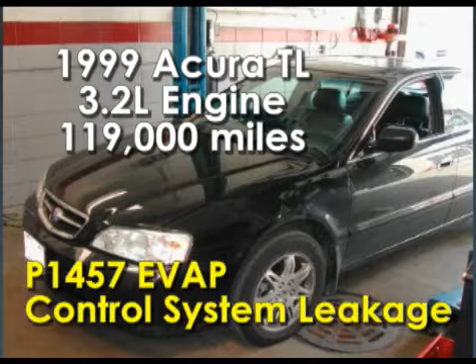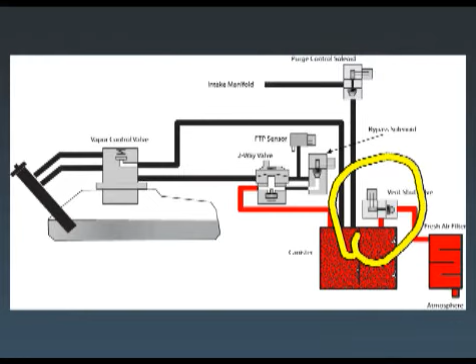So it's a '99 Acura TL. We have a 3.2-liter VTEC engine, and we have a P1457 evap control system leakage. So what should be tested? Circle the two-way valve, the bypass solenoid, circle the purge, and the canister vent shut valve. Any of these things could cause a 1457, along with a leaking hose.

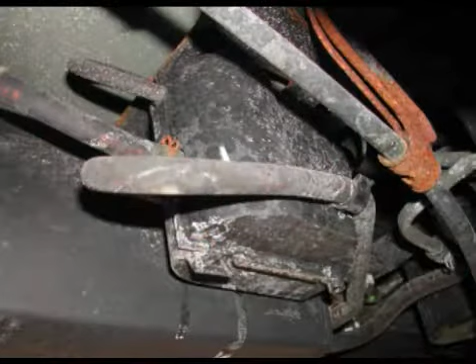There's the purge solenoid, so this is one of the players. Then we have the vent shut valve solenoid, and here we have the two-way valve that's got a cover over it. And we remove the cover, and there's the two-way valve and the bypass solenoid.

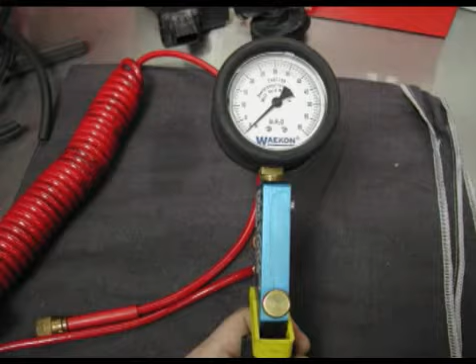Now, the way this technician is going to check this system is he's going to apply pressure to this vehicle from the cap. And he's going to connect a manometer to the front service port. And he's going to check for flow through the system.

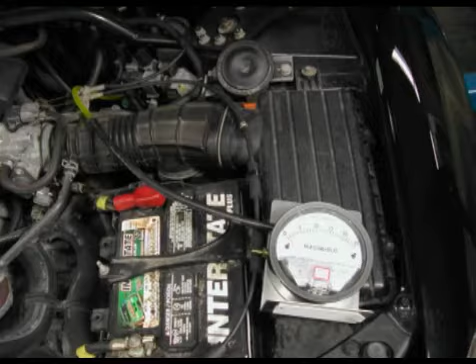Now keep in mind that this device that he's using here, if he has an evap leak test device of some other type and a cap adapter, he should be able to perform this test, especially if his evap leak tester has a pressure gauge. So this tool isn't necessarily needed to perform this test.

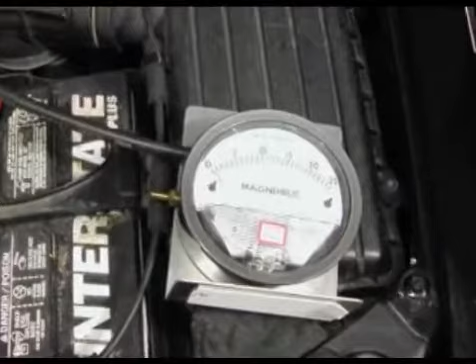So here's the fuel tank adapter that this technician uses. He says it fits all the Hondas, J, SPX, Kent-Moore number there. So his connection is made out to the service port under the hood. He connects that to a manometer. This is calibrated in inches of water, and it's going to give you a lot closer indication of the pressure.

Remember, what's going to be tested is everything on the left side of the red line. So he's going to apply pressure on the left-hand side of the fuel cap, and he's going to test that the system is sealed on the left side of that red line. He's also going to check the function of the two-way valve and the bypass solenoid.

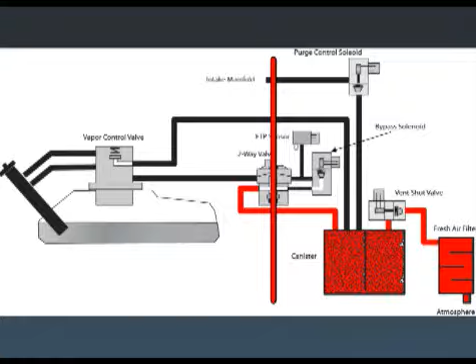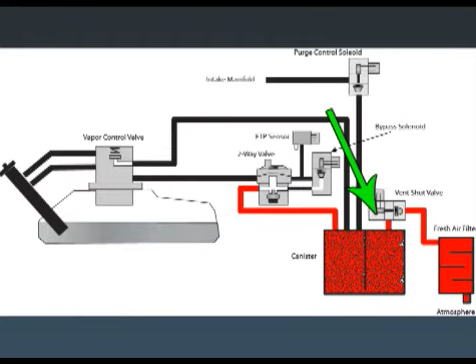So he starts applying pressure to the system, and it builds. However, it goes beyond the expected 6 to 8 inches of water. The two-way valve should allow the pressure to release into the canister side of the system, and it should go from there out the canister vent shut valve and through the filter. This indicates that there's some kind of a blockage or restriction to atmosphere somewhere in the system.

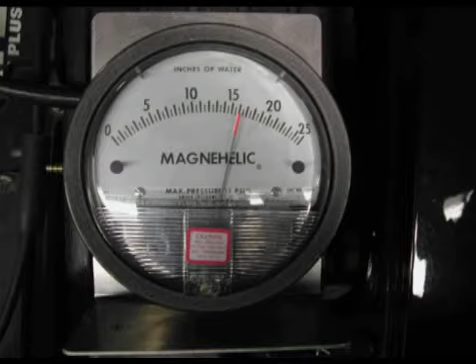Now remember, at the same time, a manometer is connected to the evap service port, and the pressure measured at this point is considered the canister. We look at the canister side manometer, and we see that the pressure is high. If the two-way valve had not released the pressure or had a restriction, there wouldn't be any pressure on this gauge. Pressure reading indicates there's a blocked path to the atmosphere on the canister side.

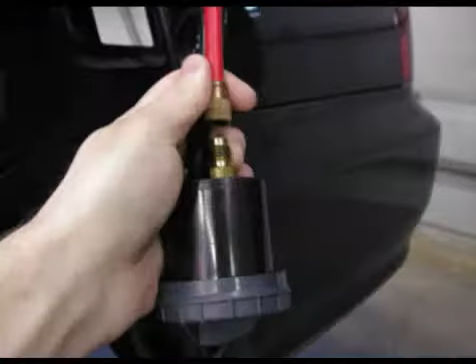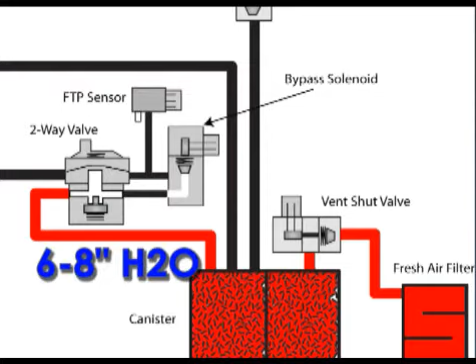Now the pressure at the tank side is released. Tank side pressure is 0 now. Canister side pressure drops down to about 6 to 8 inches of water. The remaining pressure is trapped between the two-way valve and whatever blockage we have on the canister side. The two-way valve can only hold about 6 to 8 inches of water. Any pressure above that can and should and does go to the tank side.

Since the fresh air path is blocked, the technician decides to check the vent shut solenoid. So here's the thought process. The path to the fresh air is blocked, and the vent shut solenoid and fresh air filter are the only two things left to check.

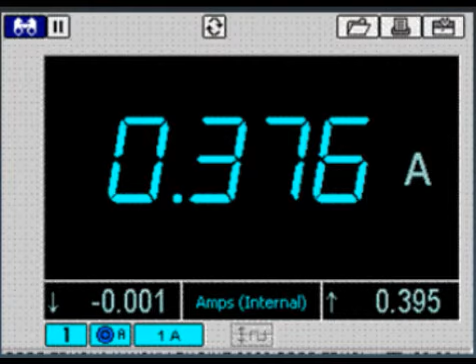There's the canister vent solenoid, and what the technician does, since he knows that these solenoid circuits are not protected in the PCM, he grounds the solenoid with an ammeter to make sure the solenoid's not shorted. When he grounds the solenoid, he gets about 0.37 amps, and the solenoid doesn't click.

Now, after the vent valve, there's a filter that goes to atmosphere. He checks that, and there's no restriction through the filter. The technician decides the canister vent side blockage is the vent shut valve being stuck. Now, the canister vent shut solenoid is replaced.

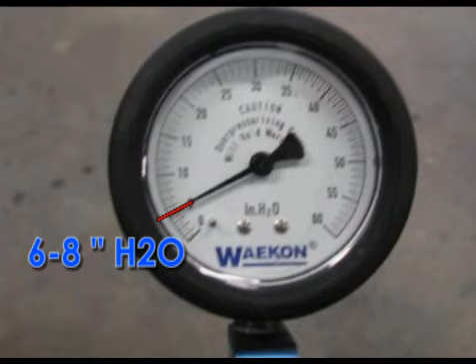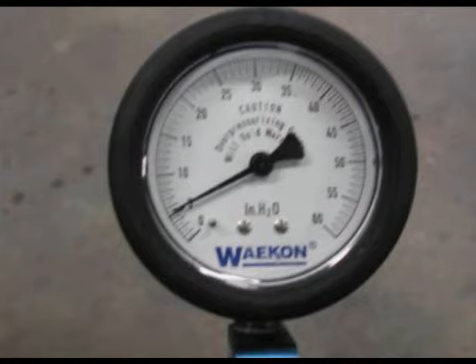He retests the system, and as expected, the pressure builds and holds to about 6 inches of water. So every time he hits the button and applies more pressure, it puts more air into the tank. Pressure releases the two-way valve, goes through the canister side and out the vent shut valve to atmosphere. Checks the canister side as well, and now there is no buildup on the canister side. The system now has a free path to atmosphere.

Points to remember: use the two-way valve to help with diagnosis. The valve should trap plus or minus 6 to 8 inches of water.